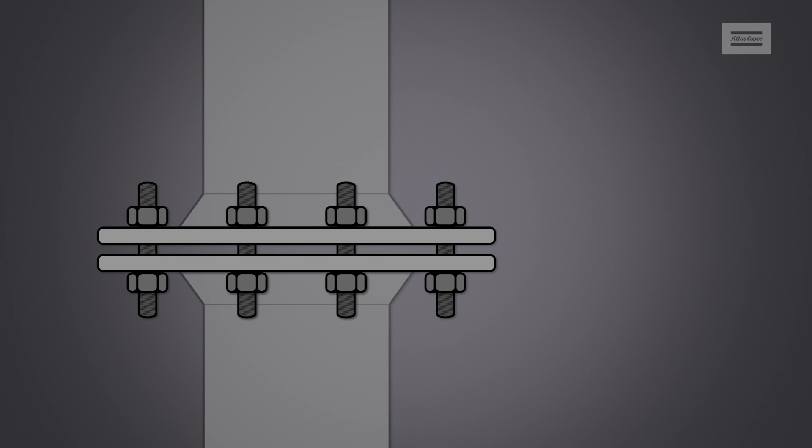The recommended is 100% tensioning, which means that all bolts in the flange will be tightened simultaneously, achieving uniform compression using just one pressurization of the tensioners, followed by a check pass. However, not all flange designs and geometry allow the use of 100% tensioners.

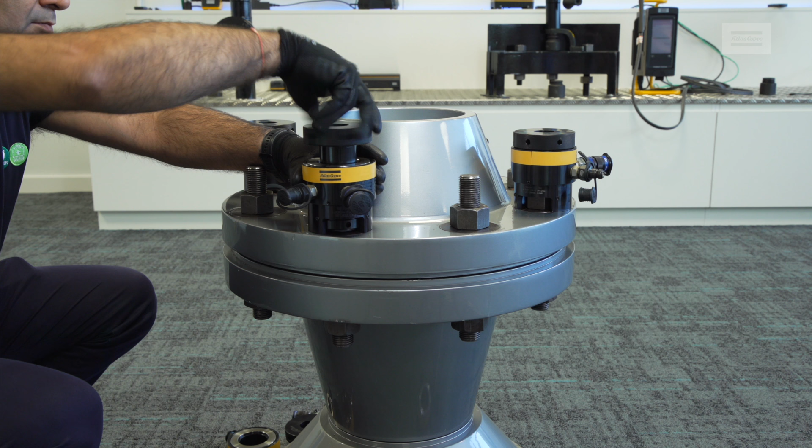50% tensioning means we use a 50% tensioners to bolt ratio. Every alternate bolt will have tensioners and would need to be tightened in two stages: first stage with pressure A and second stage with pressure B. Bolts are marked as 1 and 2, and pressure A is applied on bolts marked 1 and pressure B on

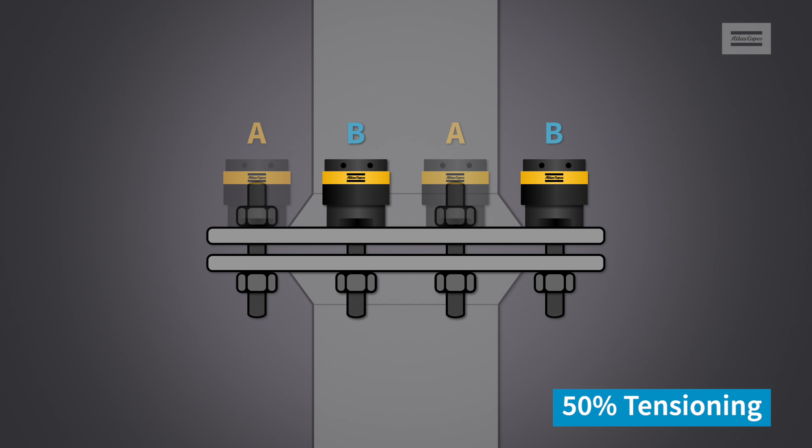bolts marked 2. Pressure A will always be higher than pressure B to compensate the bolt load loss that happens when a bolt is tensioned next to an already tensioned bolt. This cross-loading bolt loss is very predictable in tensioning.

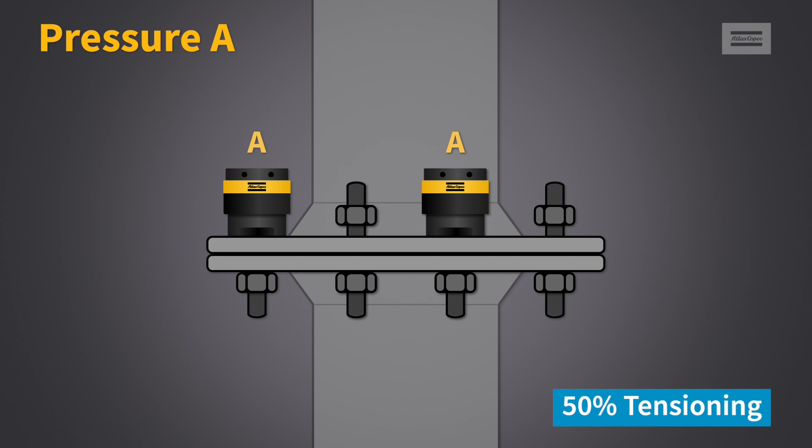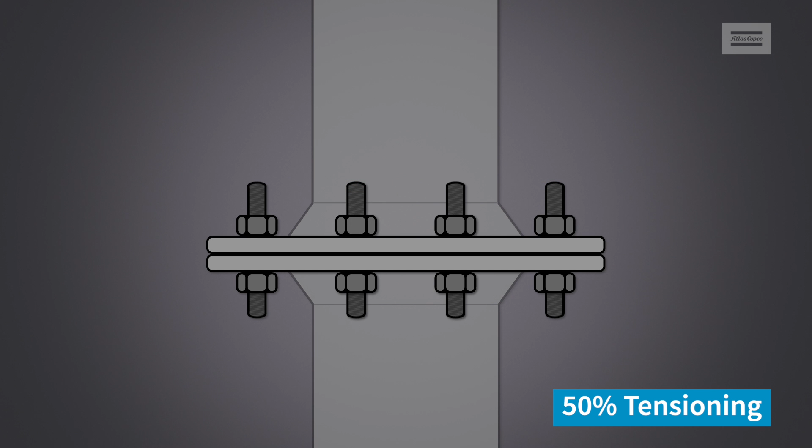To compensate for this predictable load loss, extra load is applied in the form of pump pressure A to the first bolts so that they relax down to the required load when pump pressure B is applied to the next bolts. At times, this pressure A being higher than pressure B may not be permitted, to stay on the safe side of the bolt yield capacity.

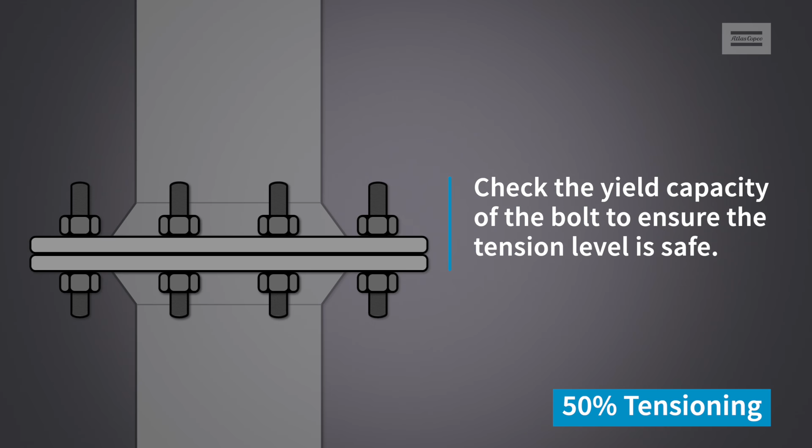In this situation, only 100% bolt tensioning is possible unless the required bolt stress can be reduced. If space from one side of the flange does not permit, tensioners can be mounted from both sides on alternate bolts.

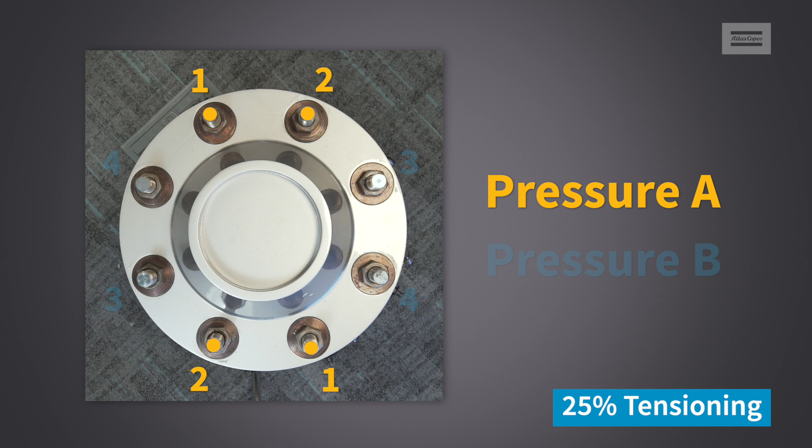25% tensioning means a 25% tensioners to bolt ratio. If you have 8 bolts on the flange, then you use 2 tensioners. Mark bolts as 1, 2, 3, 4. You are given A pressures to go on 1 and 2 and B pressures to go on 3 and 4.